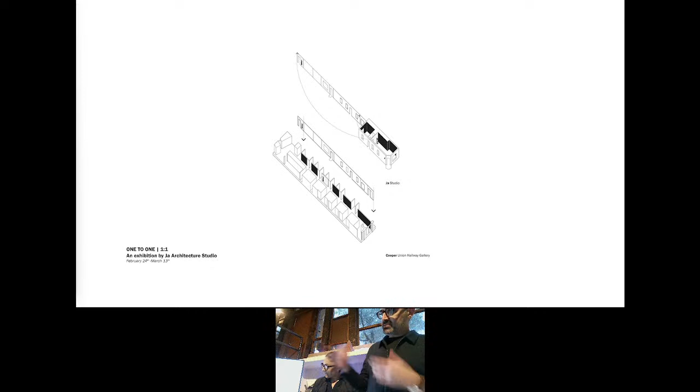As you can see, the top is our office. Basically, we unfold it and place it exactly onto the spaces of that Railway Gallery—one space in Toronto, Canada, the other at Cooper Union Building in New York with its rich history.

After placing the images of our space onto that space, we took a few critical objects, like the sawhorse on the left and a working drawing set that we liked, and a few other objects, and we placed them exactly to register the one-to-one scale of the object to the image that was in the space.

Transposing the surfaces of one space onto the other happened on all walls of the exhibition. And at its best moments, there were conflations not just of the design objects over their images, but adjacencies and overlap of objects of everyday life of one space, like the fire alarm of the Cooper Union Gallery hallway next to the thermostat of our office.

This brought about the notion of the one-to-one relationship at the core of our interests—how the things we teach and the things we learn can be navigated into almost another space, another world, if you will.

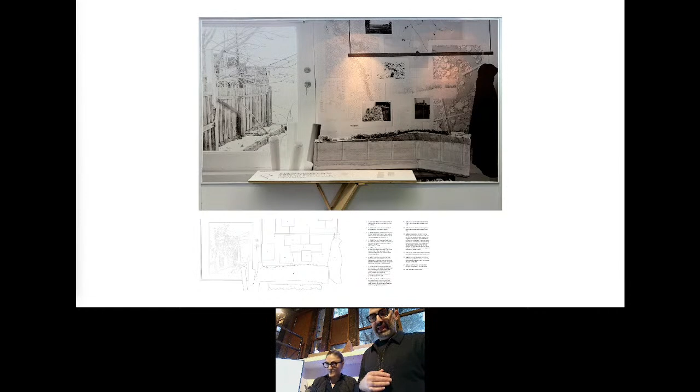Windows and views added a depth which was interesting to the exhibition. This video, a casual pan shot of the space, shows how multiple depths and conflating reciprocities occur between an object and its image—the light of one space, the light of the space of the photograph, the depth of one picture versus the depth of the space.

You see this even when the door was open, with normative objects like the doorknob of one space next to a similar object in our office. We thought there was something about that one-to-oneness which really worked as part of the experience of that exhibition.

The most important thing about this exhibition, to our mind, was that our mode of practice is registered in the ratio of objects in the office, and nothing can substitute that. You've practiced for 10 years, and the ratio of drawings versus models versus letters—that's the core of our practice.

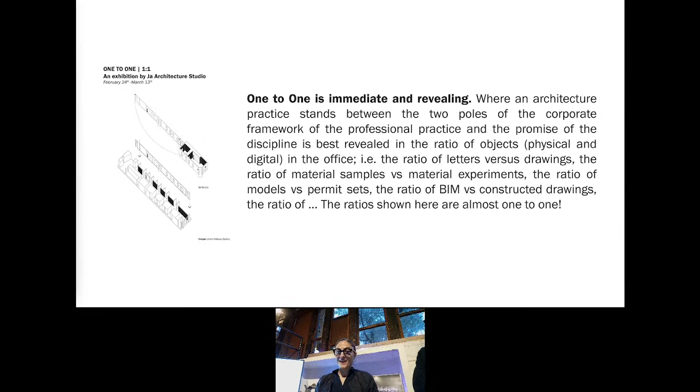As part of the exhibition, we had a series of manifesto texts explaining some of our interests and more critical thinking behind our practice, which hopefully was evident in our work as well. All of them started with the prompt 'one-to-one'—so there is a one-to-one.

There is a one-to-one relationship between the place of our practice and the location of our projects. We mostly build in the same neighborhood that we choose to live and work. We like it for the same reason we like to participate in its regeneration. We learn from its subtleties and multiple histories, neither so dominant as to be forced to follow, nor so benign to ignore. They are the experience of North American cities at its best.

One-to-one is the physical register of immigration—of being slightly off from the context that you aspire to fit within, struggle with, and eventually change by virtue of having lived there. I think perhaps our very own office stands as a true testament to this.

So here is the office. It is a corner lot storefront in downtown Toronto, in a West Queen West neighborhood, Beaconsfield Village. This is basically the shell, inside of which were the walls we unfolded for that exhibition.

At the very back of the project, we're adding an addition. The gross floor area allowed by zoning for the ADU wasn't enough for a living space, but just enough to work as an addition at a distance from the main building, which is the office. So the rituals and objects of our life and work are dispersed through the backyard to the unit in the back.

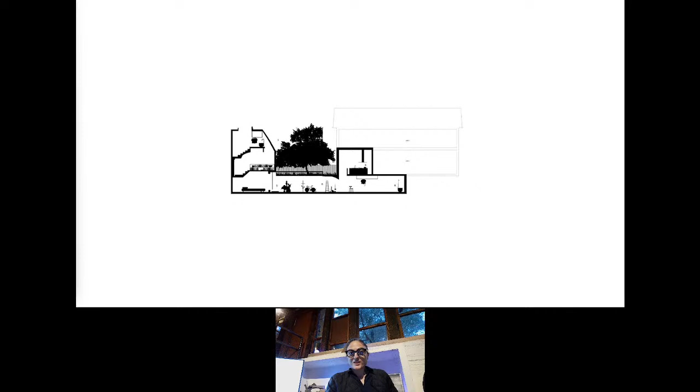So this is the project as it stands at the end of the lot, with a laneway separating it from the building behind, and you see the sunken basement with that ocular building window looking to the space below. And this is the window of our model shop currently.

That's me making a 1-to-10 model of the project in the same space that the project will occupy. And this is the back of our office. The office is a very simple gabled 2-story light wood frame building cladded in a very ugly brick that we painted white immediately. The only thing we did was we added that one window, which is basically a short door that created the visual connection between the two, all the openings in the two buildings.

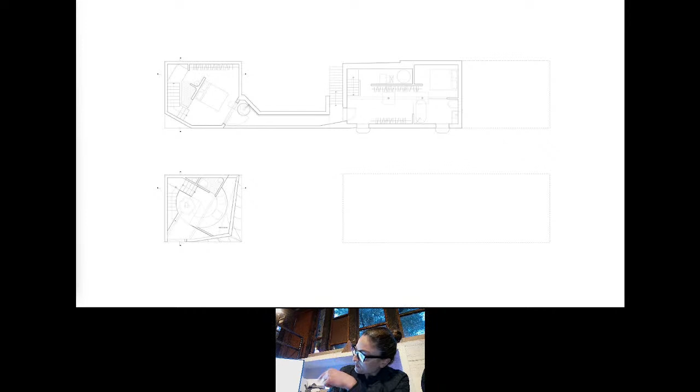The idea was a parallel between the two buildings, as well as a parallel between two modes of construction. One is the definition of balloon light wood frame construction, flushed at grade, linear wood members, studs, joists, rafters. The other is dimension lumber consolidated as tectonic plates that are stacked in different angles and configurations, and rotation of a series of structural plates within the orthogonal logic of a shell, visible in the plan.

And here is the 1-to-10 model, in the very space that it was built, which is the site for the project. The foundation is just fresh out of formwork, as you can see.

That cantilevered edge that you see goes through the backyard and registers the main floor of the building, and it also becomes the threshold where the two hybrids meet, the wood part and the concrete.

This is a series of images of the assembly of the parts: the concrete foundation, the placement of the stair inside, the CLT walls on the edge of that edge, and then the interlock of the oblique structure of the second floor plates, as well as the roof beams as one component on top of the CLT walls.

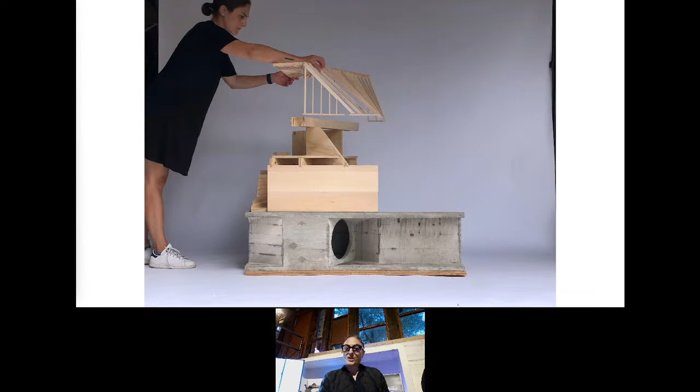And then the roof, which is this light wood frame cage, shrink wraps the CLT structure inside. And then lastly, this image, I always put it in because we like this image a lot. It looks like an exquisite corpse where one of the authors becomes part of the game. So it's a concrete base, a mid-level CLT body, and my head.

It's me? Yeah. Yeah, so from there we go to the neighborhood.

When we look back at it, basically much of our recent work all happens in one neighborhood in Toronto, Queen West. After looking at all of them, sometimes you think the whole set of projects are basically responses to one prompt. Most of them are located on lots between 20 feet to 25 feet of frontage and 50 feet of building depth. This tight constraint has forced us to operate on the space between the efficiency of a familiar type and the unique urban conditions offered by the site to reinvent the type.

This tension between the architecture and the city, the inside and the outside, and the private and the public is typically mediated through the type, number, configuration, and location of the stairs in each project, and it's highlighted in this drawing.

So, for example, in this one, it's an octagonal ADU with the tail that finds the address on the front of an existing lot with the Victorian building that is an existing building. Essentially, it's a line that folds onto itself along the two triangular stairs.

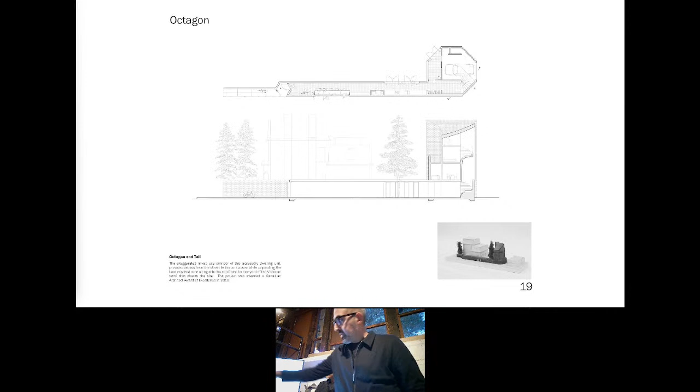And it's a moment where the architectural promenade becomes the architecture itself. It's a house, the path is the house. We created a wall along the laneway that was running along the house, and that's that wall. This is the view of the octagon from the laneway. We opened the kitchen to that laneway to act both as a kitchen for the house, but also potentially as a community kitchen for the neighborhood.

Or there's another project that we found. We noticed that between the building and the next door, there is a gap, and that became the opening line of the project.

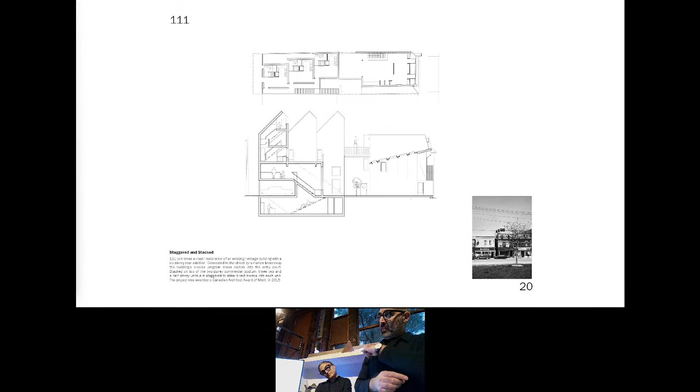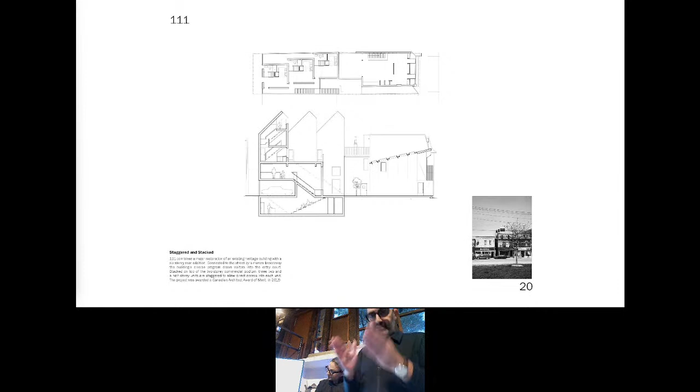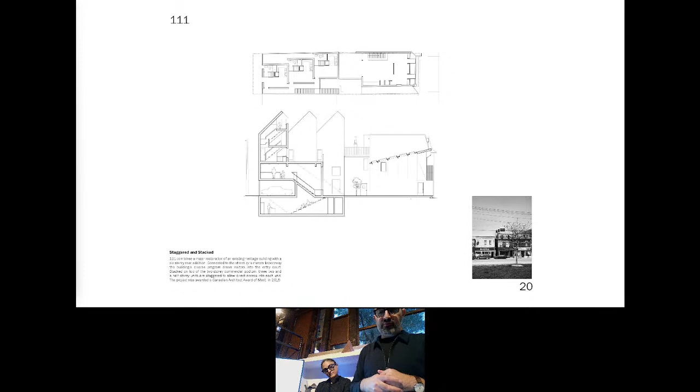We added 3 small stacked units, staggered and slightly shifted in the back, so they were getting south exposure and basically capturing light in the back, but they also created a kind of public promenade. This was a mid-lot, in the middle of the block, and we created a public promenade from the front to the back of the block. The bar on the ground floor was very popular because they closed the front door and everybody liked to go to the back just to experience the entry from the back.

And this is its expression on the street. You barely notice them, but you can see the 3 staggered units on the side. The idea of the houses were simple: just stack 3 rituals of life on top of each other, with one run of stair stacked on top of itself.

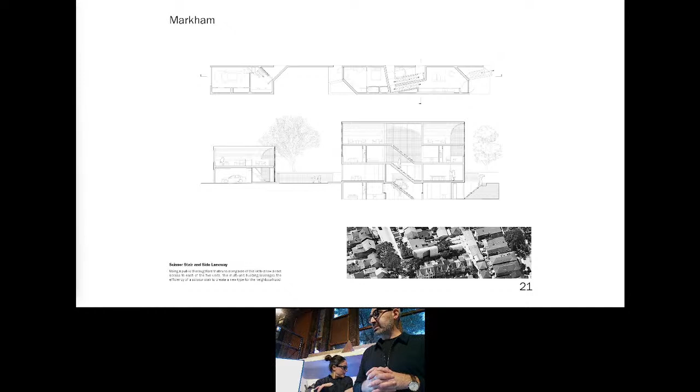This was an exploration of using scissor stairs, with this slightly tilted scissor stair, and a narrow mews or laneway that we found on the edge of the property. That was a public thoroughfare, and we used it to create a kind of multi-unit building using multiple entries, and also 2 access points to the basement. So it's a very compact way of creating 6 units within one shell.

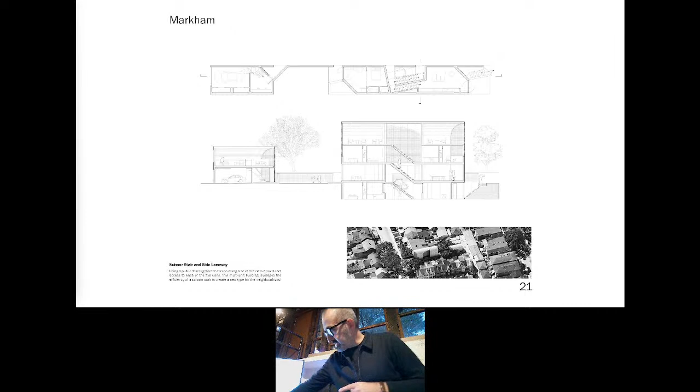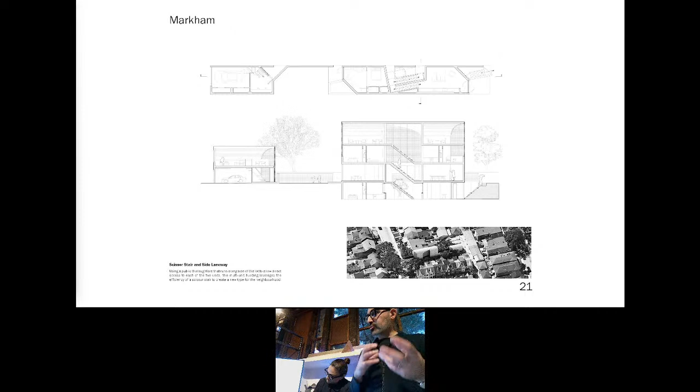As you can see, it's slightly noticeable in the neighborhood, but this is in Toronto, and that neighborhood is trying to add to its density. Everybody's trying, and the question is, how can you do it? Our effort was, how can you stack back-to-back units, but at the same time find ways of getting cross ventilation across, so units that have both front and back access.

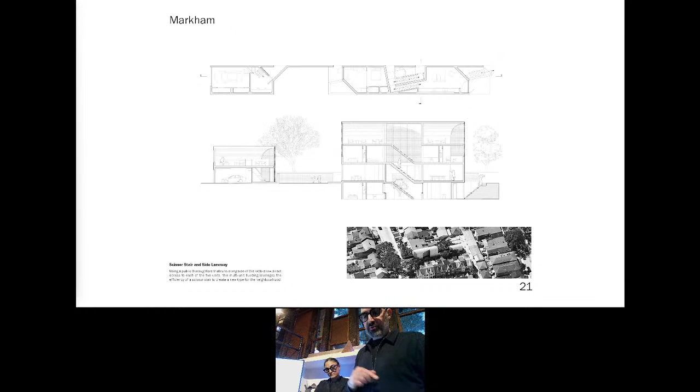This is the geometry of one of the units that gets interlocked around the scissor stair that is right in the middle. We basically created a kind of blank facade with the chamfered edge that registers that walkway on the edge of the building, and that would take you to the entry in the middle.

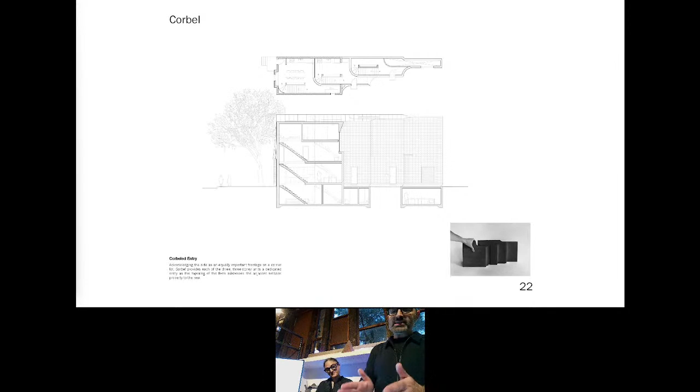And the last one creates something unusual — in Toronto, we don't really know how to return the corner. You can't turn the corner because houses are arrayed along an edge, and the moment you reach a perpendicular street and create a corner, this house has an exposed backyard. So the backyard of the last house is exposed.

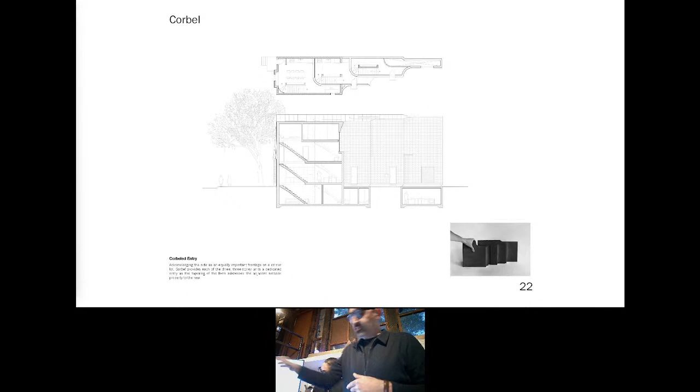So this was an idea of how you can create a series of units in the back with individual entry, but the last one becomes a very narrow wall that is only there to capture light to the basement, which you take over that territory, but at the same time becomes a wall for that block.

We used the same slate shingle of the house and cladded the whole thing, and that's that thin element you see. Essentially, when it gets to the basement, it widens, and that's the space where it is. The rest of it is capturing light, and it's also extending the trope that we incorporated for the other units. And we also love these tectonic models.

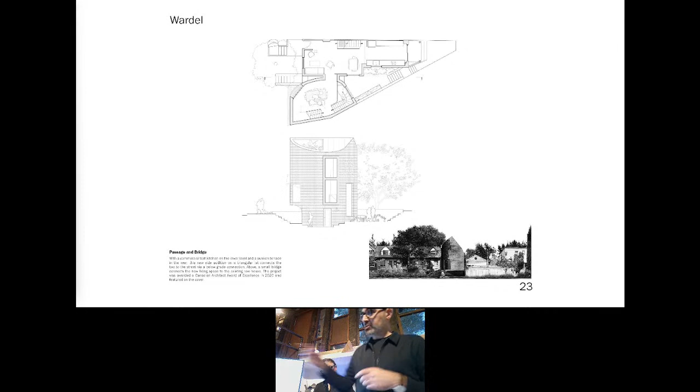This is another project, same theme. The lot is very odd, and we wanted to create a side addition to an existing house, but instead we thought: how can we create a tangential line so that the addition and the house only meet on one point? In reality, the moment you give thickness to things, that thickness produces a kind of threshold between one space and the other.

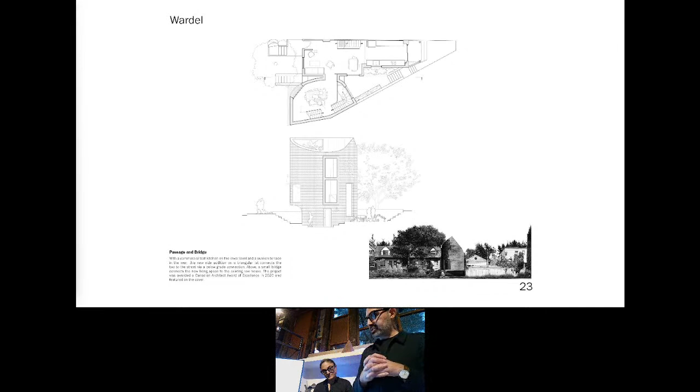It was for a chef, one of our clients, who wanted a commercial kitchen in the basement with a sunken backyard. We wanted to basically enter from the front, go on the path below grade, to that sunken yard.

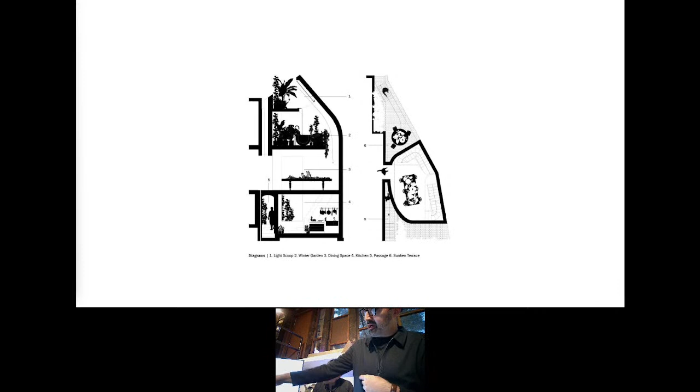So you have essentially 2 bridges. One goes below grade, the other one is perpendicular and goes over. And you can see in this section how we get light to the house, and that falls exactly where the circulation is, and it takes you up.

So it's a project that in plan and section you can clearly see the whole idea. And this is the expression of the project on the street, and that's the passage that runs to the sunken backyard. And that's the backyard. You can see the passage, and you can also see the stair that is going up with the light that is captured through that.

And this was also published. We won OAA Awards and Canadian Architect, and we also modeled all of those bricks. And we did. Someone did.

Kaveh Tahir is one of our best interns, with all of that, 3 weeks of doing that. And we still look at it, and every time, and this is on our way, our office is very small. Every time I go to the bathroom, this is sitting there. I always touch it.

Now I'm going to talk about a set of other projects and a theme in them which struggles with the way in which known formal repertoire of light wood framing, like gables, dormers, and roof geometries, can start to crossbreed with figures and icons non-native to them.

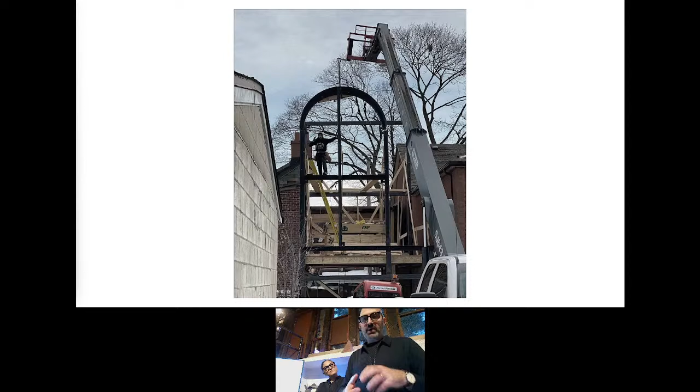Also, the interior organization is triggered by the configuration of the stair, so everything becomes tied together. And that's a shot of 44 Fox Street that I'll show you. This is the moment that the plan is kind of being implicated in the operation between the facade. The stair configuration is basically triggering all the moves.

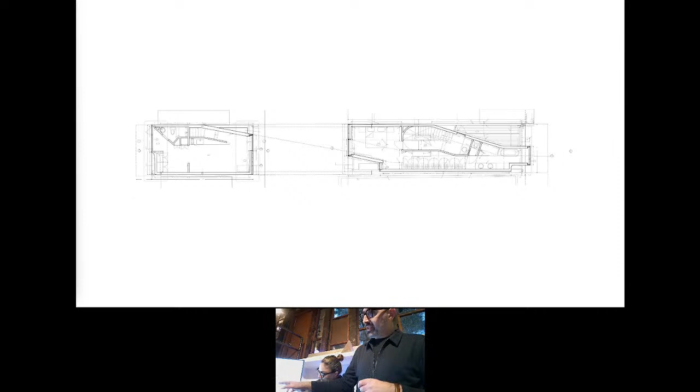It was an idea of creating a relationship between a building and an ADU in the back, and how can you create some kind of formal reciprocity, as you can see in this diagram. One of them is slightly smaller, so it's not quite an equal courtyard, but how can you create some kind of formal reciprocity between the two?

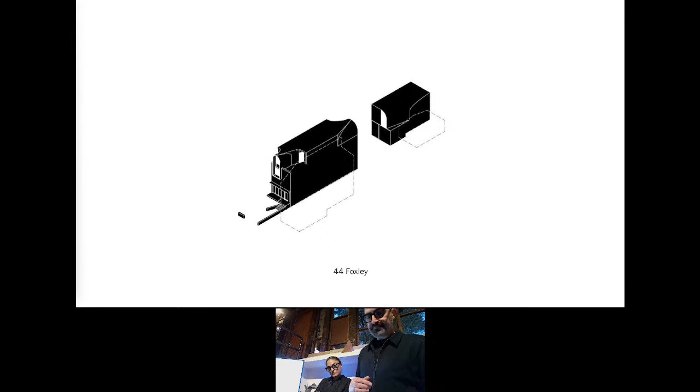So we use the angle of the stair to kind of register formally the two geometries. And the question of thickness, when you're dealing with thicker cladding, how can you use that edge profile to sometimes extend the structural plate to incorporate the thickness of the future brick cladding, and how you can get crisp edges if you want to create a kind of expression of thinness.

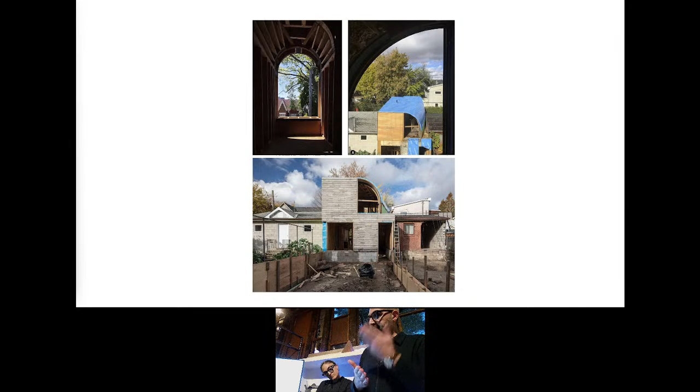That was a one-to-one mock-up of that, and this is the corner building that Behnaz showed. Sometimes we are doing this neighbors thing, they panic, and that's a mock-up that we just do right on the front. Interns go out, we go there, and we start doing this, and they always look at us like crazy culty people.

There's not a dominant language in the context, and we really liked the blankness of the next door neighbor that we had, a party wall. We wanted to extend that language into our architecture, and also add things that were non-native to the language of the neighborhood. That was the starting point, but this is a changing neighborhood, so at some point it backfired, and somebody else bought that property and started taking it over.

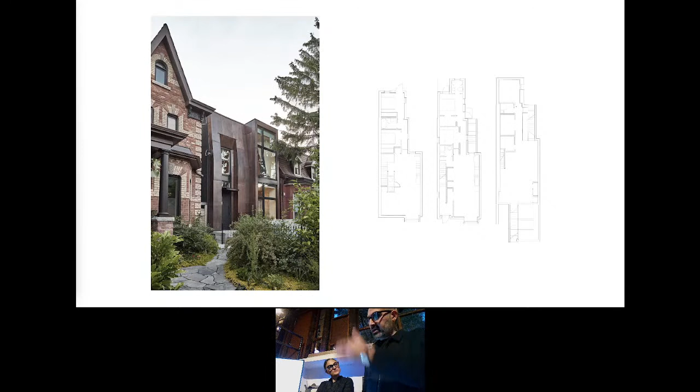And this is one that we did. We took the angle of the mansard roof and blended it. Mansard roofs are kind of unique because they are not roofs, they're kind of slanted walls creating space on the top floors of buildings, and they want to give the impression of a roof. We blended it with the wall, but it's the same language as the buildings on the side. We also rotated it and created a wall of privacy for the space. Again, it's all about adding to the density of the neighborhood.

This is a front sunken yard that gives direct access to a separate unit in the basement. Then this one is about adding a two-story addition onto a single-story bungalow, creating two nested outdoor spaces along a pentagonal stair—components inserted onto that bungalow, and you can see the quality.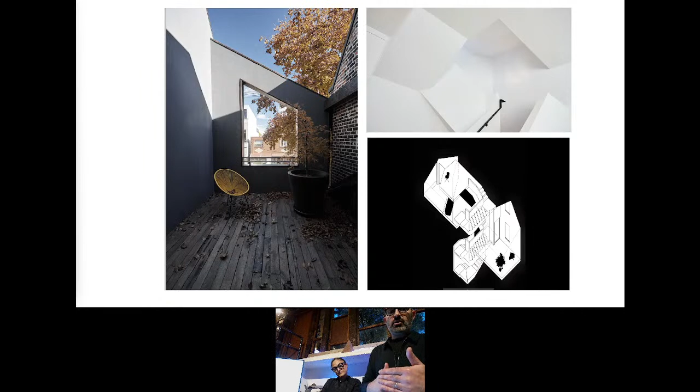This was a very shallow lot. It always comes from the urban aggregate and the problem of the lot where we find the potential. This was a very shallow but wide lot, and we thought we could create outdoor spaces within the body of the building. And this one is about how some of the very important spaces...

And this is another one. It's called... what is it called? Underscore Gallery. The Underscore project is essentially a combination of a gallery at grade, a bar in the back, an artist residency in the middle, and an extension of the gallery at the very end of the building.

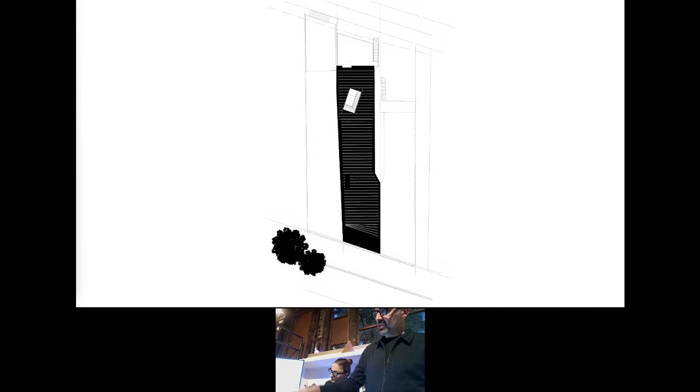We used a simple motif—because we kept the two existing walls, we created three elements. Two of them you can see on the front. One of them was a skylight in the back that registered the relationship of the lot to the oblique condition of the street, essentially perpendicular to the street.

So it's a very odd subdivision of the lot, and when you go to that back gallery, you see again one of our motifs, this time sitting horizontally as a skylight. When you're in the space, it registers the oblique nature of the street that you're otherwise unaware of—that's the shot of that space, showing the direction perpendicular to the street, essentially the grid.

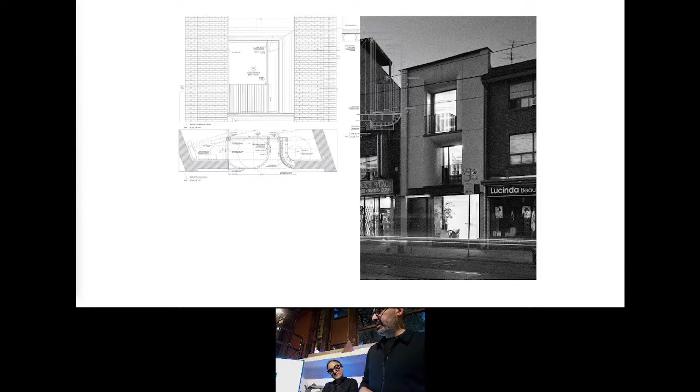And this is some shot. Okay, and this is... or is it me?

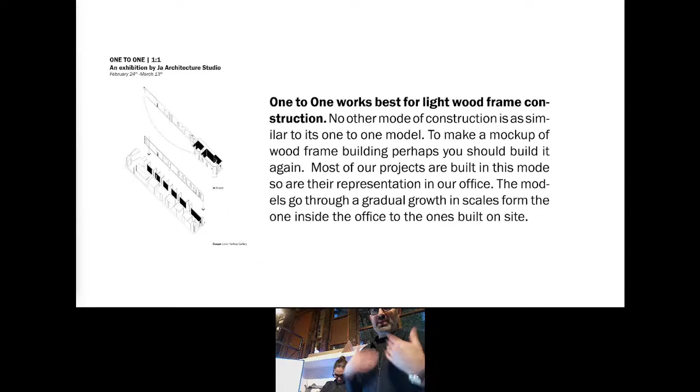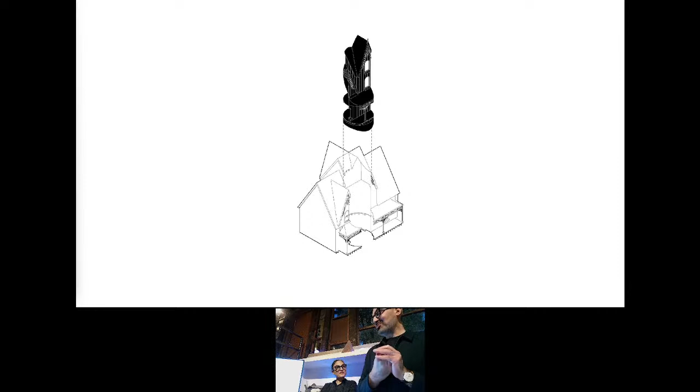That's me. So this interest in light wood frame became something we thought had so much richness in it. We did a project called Boring Lightness for the Venice Biennale for the Canadian Pavilion, and it became a finalist. Didn't win—twice finalist, never won. But the idea was about how it was boring, because light wood frame is normative and boring, and you don't think there's architecture expression there. Lightness was the fact that it was very light, and at the same time we liked the idea of boring these cylindrical cuts out of existing buildings.

We asked architects to do that—one of the architects in Canada—to pick a historic site and give us a bore of it. All of our interest was triggered by the writings of Vincent Scully, both to understand the history of it and to enjoy it architecturally. Venturi brought it out, stripped it of some of its stylistic tendencies. The expression of Leap House—I love the gap at the bottom because you see the concrete piers that hold it in the air, and there's something fantastic about the physical lightness of it, and the fact that it can be transported to a new site.

This was a quarter-inch model of the project that we wanted to show the jury, to convey the experience of being in a house built with this method—it's about movement and getting a sense that, if you've lived in masonry buildings, you would never understand how light this structure is.

Is it not playing? Seems like the codec is unavailable. Does it show something? No, I have it. Do you want to show it? Sure, yes. Sorry Stephanie, I'm going through your stuff. No worries, it's not being streamed. It's just catfish. That got streamed. Oh come on, okay, it's doing something weird but it's doing it. Very good at this, very good. Let's see. I don't know, it's not working, it's not worth it even. Cancel, cancel. Okay. I think it's nice, yeah maybe. Oh don't spoil it. It was worth it, I guess—the jury really loved this.

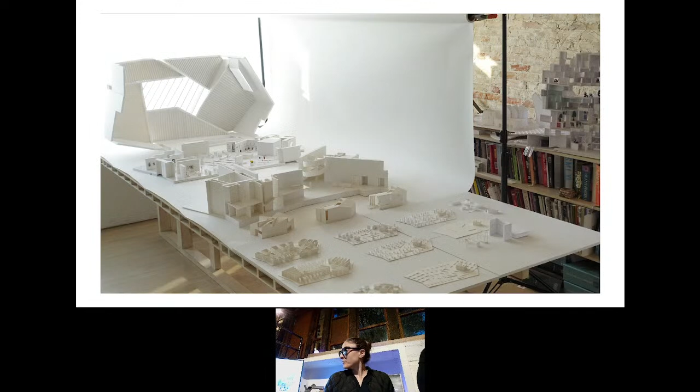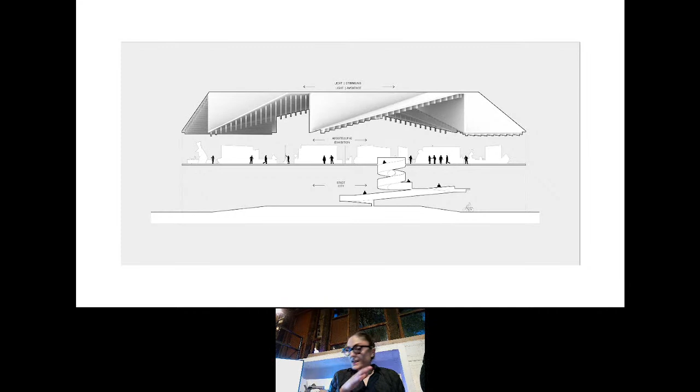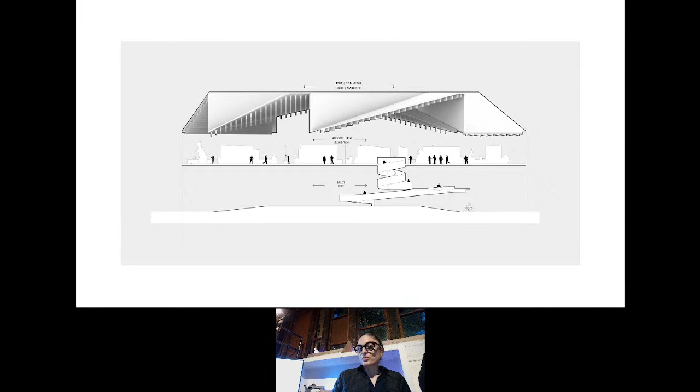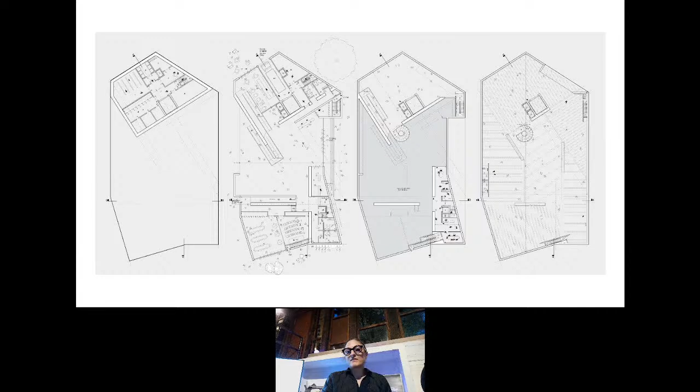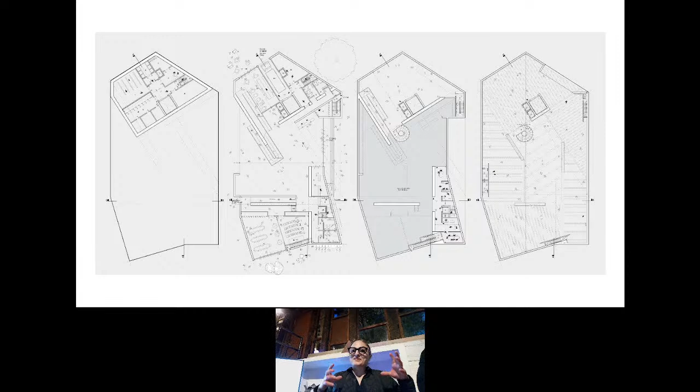Our proposal was to create two stratas: one on the main floor about the city and the park, and a second one as a permanent exhibition, where the reciprocal structure of the pitched roof created different exhibition territories underneath it. You can see some of our similar interests here again—the tension caused by packing orthogonal geometry within a polygonal shell. I think in ways this is very similar to Gropius's challenge to contain centrifugal diversities within one single shell, which was the school.

This is another one. These are all, for some reason, very low res now. No, they're good? Good, okay guys.

So the second one is our proposal for Kaunas Concert Hall in Lithuania, which is a pure pentagonal outside shell that registers the existence of two concert halls within, by gently varying the slope of the roof towards two raised corners. The site was amazing—along the river where it separates, and the river fluctuates, so most of the site is underwater. The site plan was exciting because we had to design it to be functional at different water tables, so that public space is always active at some point across different water levels.

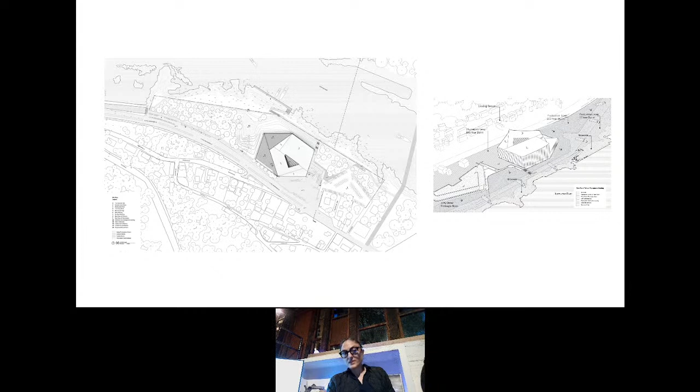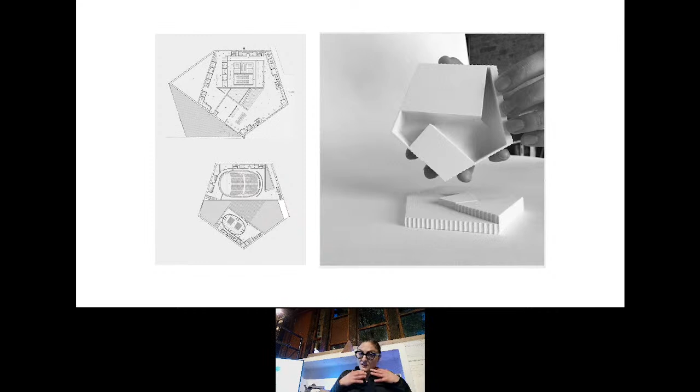And then the interstitial space between the two concert halls became the important processional space between the halls. It was like the space for the city. And here's that processional space.

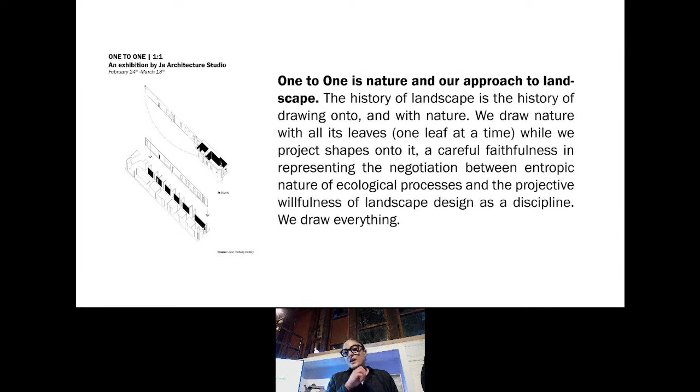Which brings us to landscape. The history of landscape is a history of contradictory forces: nature versus human, native versus non-native, spontaneity versus control, interconnected systems versus forces of fragmentation. And in all of these dualities, there exists a threshold that lies between the two, doesn't belong to either of them, but is impacted by both.

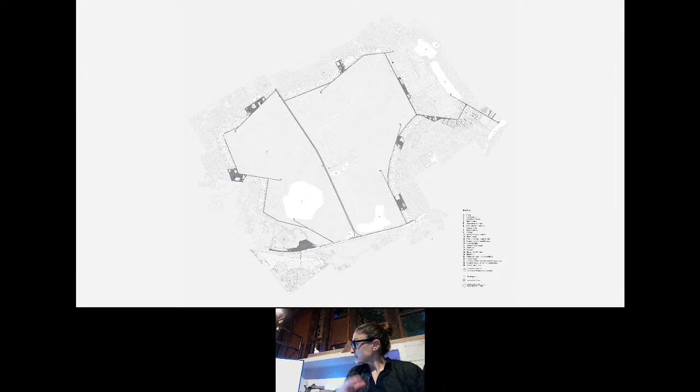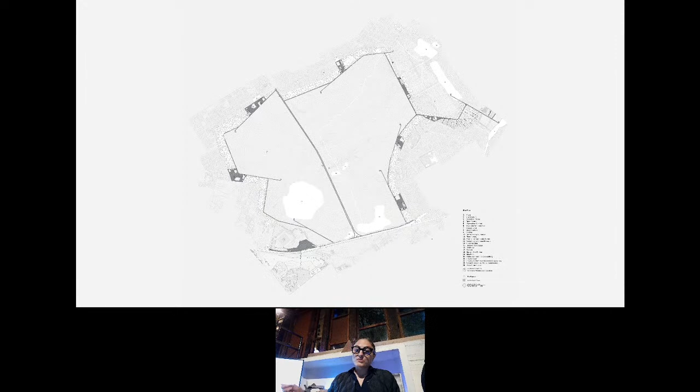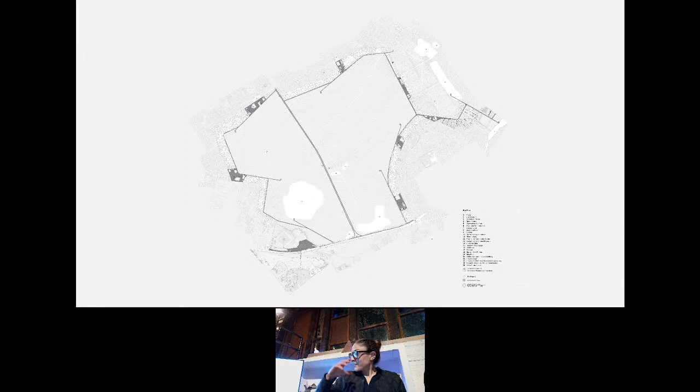That's where our interest in ecology and landscape lies. That space where unpredictability of ecological processes meets the abstraction of urbanity, where our understanding of third landscapes meets the poetics of terrain vague. These thresholds come in different scales, and we're interested in all of those scales. This is a large scale one - a competition we did in Lima, Peru, where a thin ecological membrane or buffer contains an archaeological site, with historic fabric on the outside. This was interesting because it was a very arid site, but it contained the largest freshwater table underneath. So I think the threshold was also in the section.

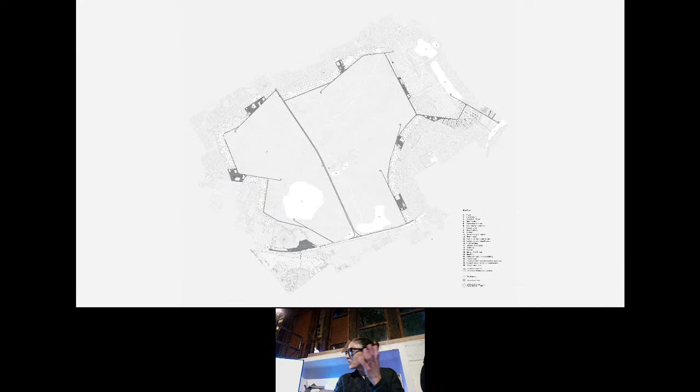This third landscape becomes the link that connects pockets of ecology, ecological systems, climate, water, flora, fauna. What we designed was basically a series of architectural interventions along a looped ecological promenade, with wind towers placed on top of wells connected to a qanat system, called pukios there - we called it qanat in Iran - a traditional system that brings water from underground using only gravity. These wind towers registered that system, and the water was tapped for irrigation.

The small scale: the leftover patches of green in urban context, that leftover land protected by city bylaws and encroached upon by developments. Our office's side yard is one of these small patches. These are interconnected yet fragmented networks of ecological systems, where a change to the ecological makeup of one of these potentially can change that of an entire neighborhood.

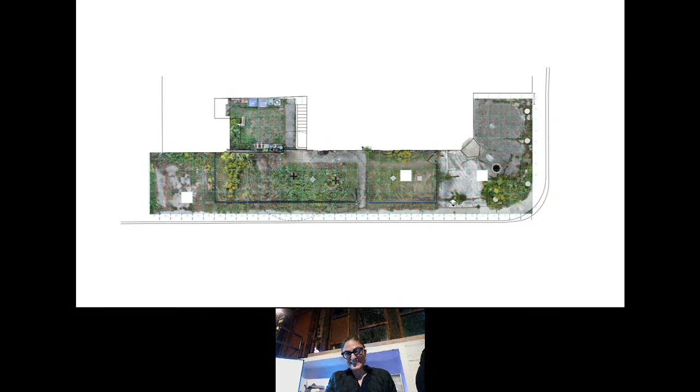But the yard is also the threshold where our one-to-one material explorations and mock-ups meet our landscape interests, and we gradually push them into our projects - like this one, which Nima showed, 44 Foxley. That is like an urban yard again, the threshold between permeability and impermeability, biotics and abiotics, and a moment of spontaneity - the first sprout of spontaneous plant growing in that blurred boundary, and we were very excited about it.

One more large project: the third landscape that lies along a railroad corridor in Toronto, Metrolinx, for those who don't know. This is a railroad that connects, or is supposed to connect - that's an expansion - the very eastern corner of the Greater Toronto area to the very western corner, from Exhibition Place to Science Center.

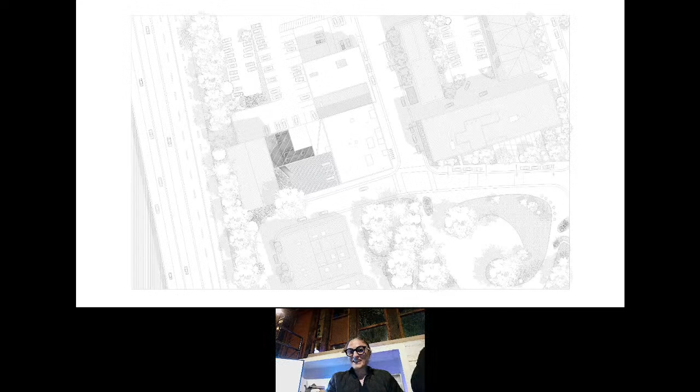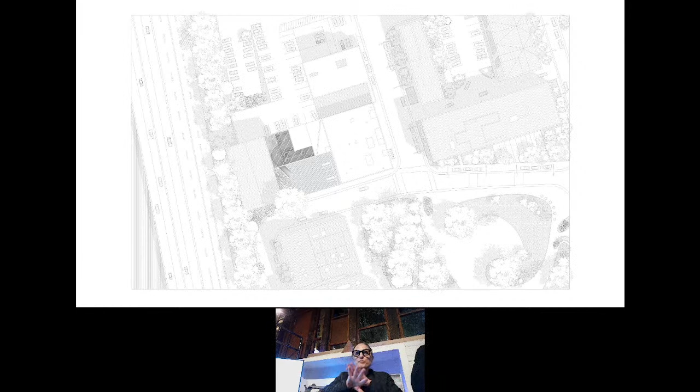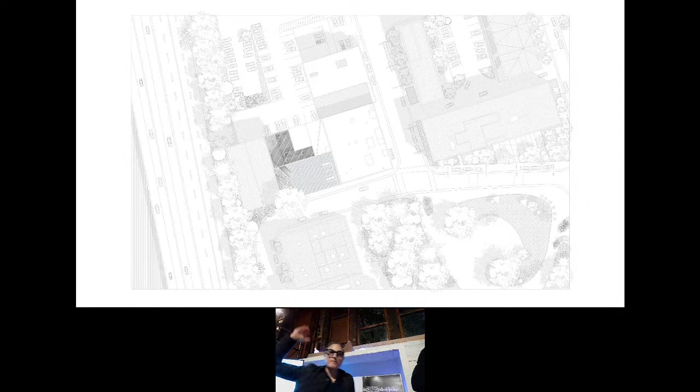Which brings us to our most recent and last project of the day, the Light Grain. This project also recently won an award that will be announced in March. A site located along the Don River. Toronto has two ravine systems, Don and Humber, and both are in many parts pushed to the thresholds by the forces of development and infrastructure. Here, that's Don River, that's the DVP, a massive highway that pushed Don to the side, and they even straightened Don in some parts as a result.

So once again, the linear interstitial space along a major infrastructural corridor in the city, a leftover from once an interconnected ravine ecology, and the project's careful reuse of an existing residual ecology suggests the potential to reframe an understanding of these leftover terrains without radically altering their nature.

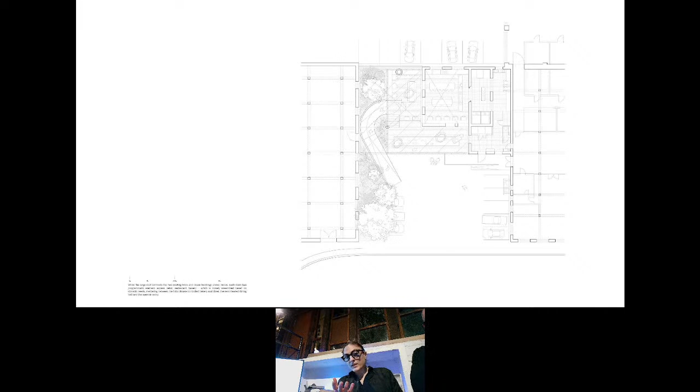A horizontal band creates a visual connection between two existing factory buildings, leveraging this underutilized gap to create a sense of entry. Utilizing a threshold that is neither indoor nor outdoor, neither insulated nor completely open, neither pure landscape nor pure architecture. This is that leftover land, that biodiverse, resilient landscape.

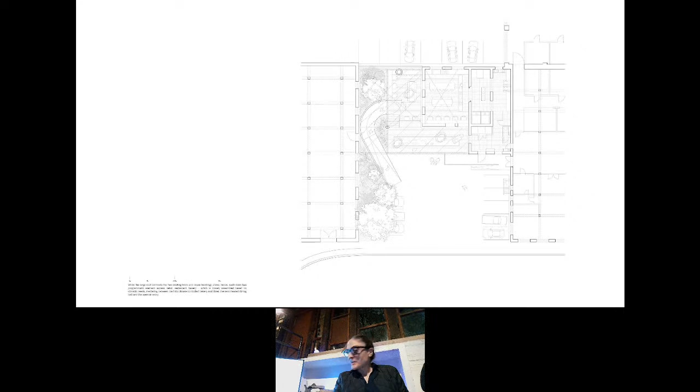And here, the generosity of the third landscape allows accessibility not to become a requirement to satisfy, but the main expression of the project.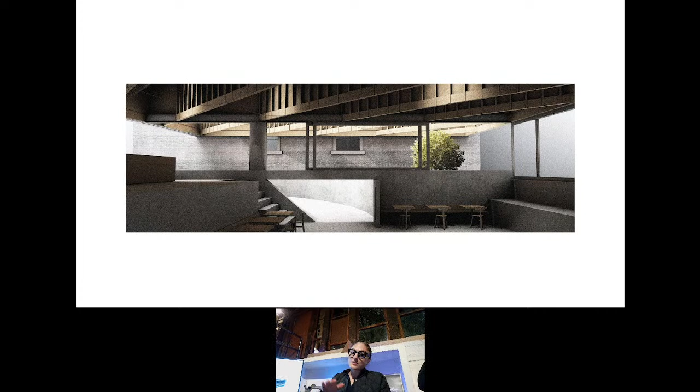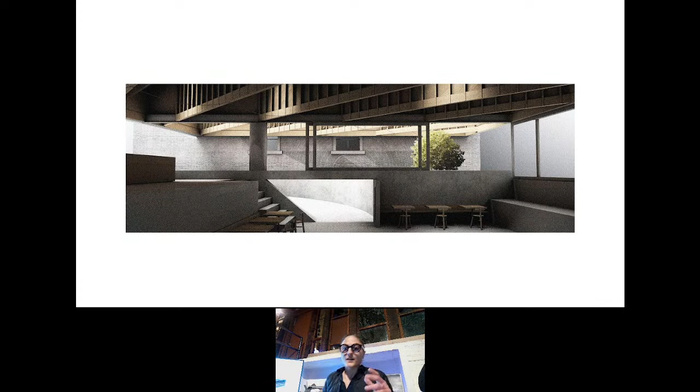So inside and over the entry, the space is covered by an open air structure, while the interior is a sawtooth roof punctured by large south-facing oculus skylights, which you can't see, but you see the light animating the space below.

Mediating between the logic of the roof overhead and the sweeping cut of the ramp is a single point, a column that marks that point of convergence. The column at the center of the figurative ramp supports sister steel beams, allowing the roof's long span and relentless structural logic to generate an honest and workable tectonic.

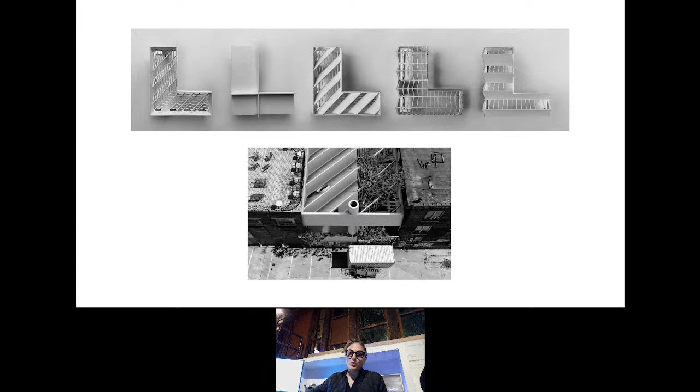Here are some of our iterations for the roof. The roof spanned across that gap, but it was half covered and half not, so that the exposed half would allow the existing spontaneous growth to continue to develop over time.

On the interior, there was minimal intervention on the space. We wanted to allow the residual history of the building to remain legible while also supporting the functions required. In this way, the building feels not like a finished project, but rather a work in progress, which I think is the closest architecture can come to landscape.

Here are some of the spaces that we like in the project. The easement on the side that was used for light service, now becoming a ground for a lush, spontaneous urban ecology, or the familiar North American typology of a long linear diner as a performance space for production.

And lastly, a kitchen that extends over and looks over a dining hall and a cantilevered balcony, creating a reciprocity and immediate relationship between the rituals of baking and the rituals of eating.

While each of these components, like the chimney, the roof, the beam, the column, the ramp, has discrete logic tied to both its figure and function, they also contribute to the assembly as a whole that ties the two existing buildings together.

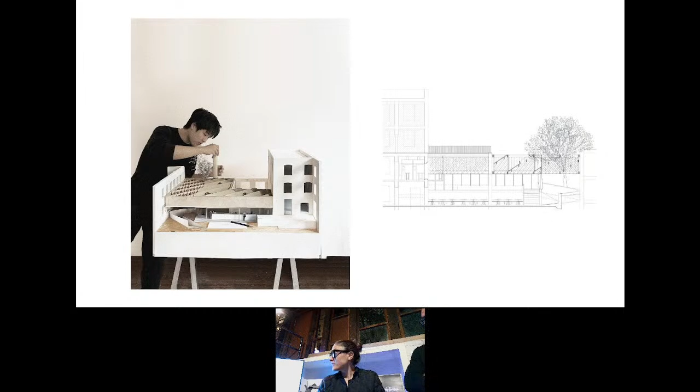In the end, I would say that in the larger lens, the historic location of the two in relation to the major infrastructural corridor and the ravine has the potential to reframe our understanding of sites and how ecology is formed in the interstitial spaces. In a way, through imagining its potential, it suggests becoming part of a string of similar projects that, without radically altering the nature of these terrain vagues, brings them into our consciousness and enjoyment through meaningful uses.

And lastly, we would like to think that this project in ways highlights what we would see, and we're hoping it would be more evident in our projects to come: a sense of reciprocity that comes from dealing with charged thresholds where tectonically raw architecture meets the spontaneity of ecology in these terrain vagues. Thank you.